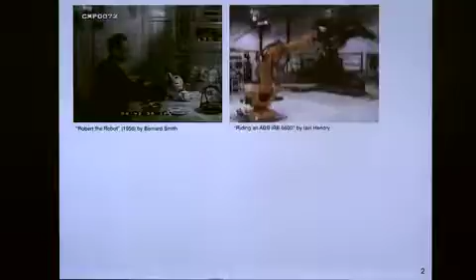Have service co-robots that we could bring into our homes. These would be fairly affordable. Every family could own one. But when it comes to what we have existing in terms of conventional robotics, I mean, something like this would be terrifying, right?

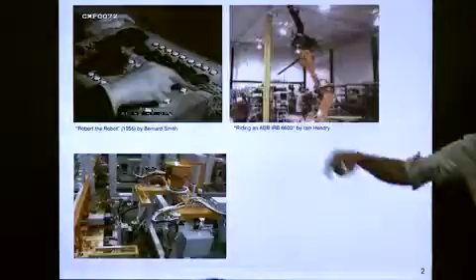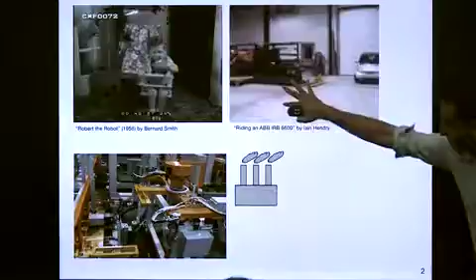And for the most part, robotics has not delivered on this promise of service robots, but it certainly has done extraordinary things in an industrial workspace. Okay, so the idea here is, what do we need to do engineering-wise to get from this to something like this, where we could have robots in our homes, hospitals, schools.

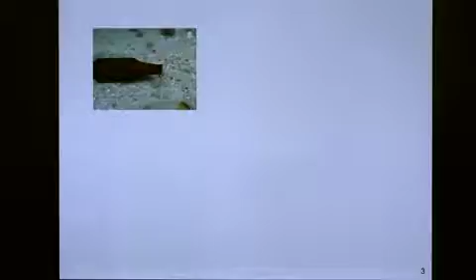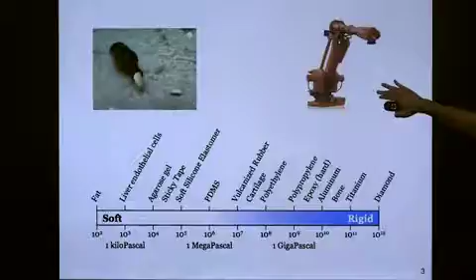And from a mechanics perspective, what I see is a really big challenge, not just from a robotics and application standpoint, but even a scientific or intellectual challenge: how do we re-engineer our robots and machines using a completely different set of materials, in particular, materials that are on a completely different end of the spectrum when it comes to Young's modulus.

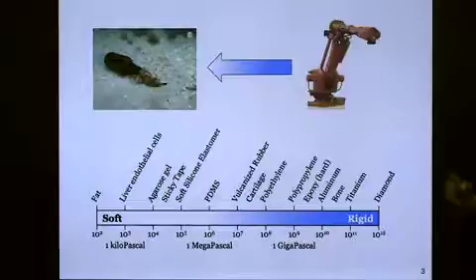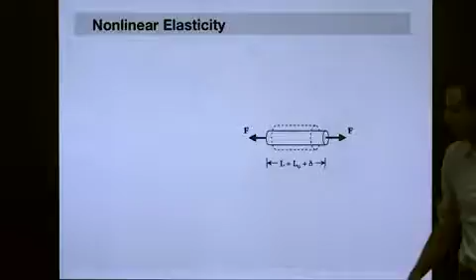Okay, so Young's modulus is just one metric, one measure of the elastic rigidity of a material, and even for Young's modulus, we know that this is a fairly limited definition, right? Young's modulus scales with the amount of force it takes to stretch a material, and it's fairly linear when it comes to very small strains. Strains in the order of, say, fractions of a percent.

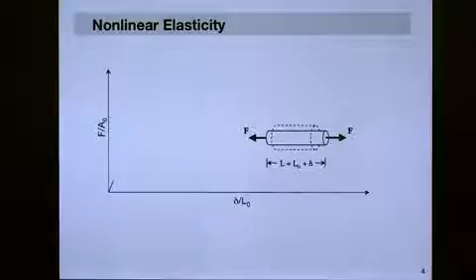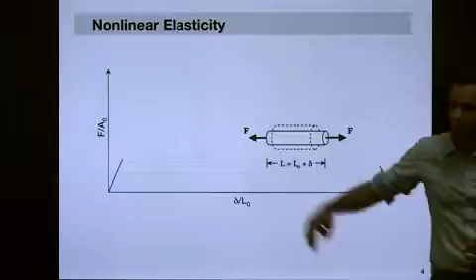But when we talk about soft robotics or soft biologically inspired machines and systems, it's quite possible that we're going to be seeing strains well outside of this linearized regime where Hooke's law is applicable. So we have to be a little bit more careful about the types of constitutive properties and the theories that we use to examine these classes of materials and machines.

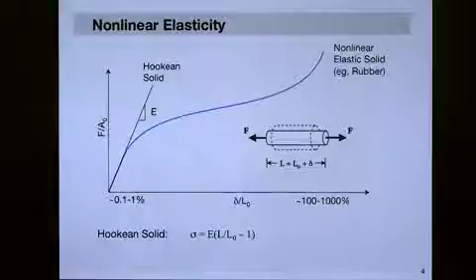Okay, so Hooke's law is fine for conventional, more rigid materials, hard plastics, metals. But a lot of the work that we do in my lab is in addition